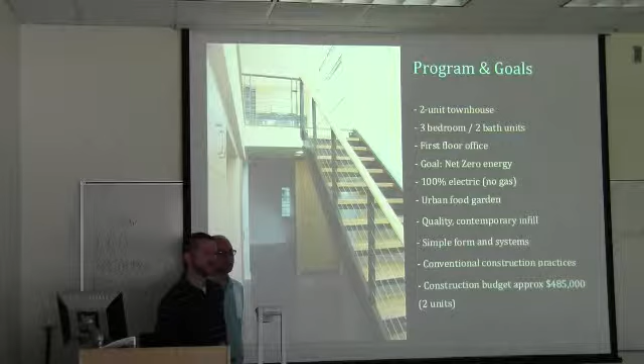All right, now moving on to the Trekhaus. Ella and Randy, who were the clients in this project, just by chance came across the core house and really liked it, and started looking into passive house and realized that was the way they wanted to go. They moved to Portland a couple of years ago and knew they wanted to live in a high efficiency house. Really, their goal was net zero energy. So they did a ton of research seeing what was out there, and they liked the idea of the core house, so they asked if we would be interested in working with them. They found this piece of land over on Southeast Taylor and 43rd that seemed to work well.

So we started designing, and the program they had was that the lot was zoned for 2 units, so to them it made sense to go ahead and build the full 2 units, which gives them kind of a passive income as they get older.

They're looking for a 3-bedroom, 2-bath unit. One of the requirements was that there's an office on the first floor, kind of right near the entry, because Randy is a chiropractor, so he wanted to be able to practice out of his home without having people go all the way through the house.

As I said, their goal is to reach net zero energy use, and that means 100% electric. You can't really offset natural gas use. So we basically decided from the get-go not to have fossil fuels in the house.

A big thing for them was also the garden. They really wanted to have an urban garden that they could grow a lot of their own fruits and vegetables. So that had an impact on the site design.

And then things like quality, contemporary - they kind of like the contemporary look that's in the city. Simple forms and systems, mostly to keep costs at a reasonable level. And then something that's, I'd say, more one of our requirements was conventional construction practices.

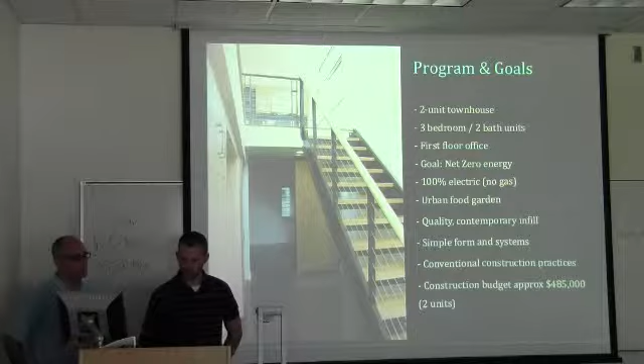And then for construction, they had budgeted about $485,000 for the 2 units.

So just real quick, I don't know how much of this you've seen already, but on the left here we have the first floor. I didn't do a site plan - I have an aerial view coming up - but north is up, so south, and then also the street are down here at the bottom.

On the first floor, so the 2 units, this is 1 unit here, entryway, and because of that office on the first floor, which is right here, we decided to move the living areas up to the second floor. That helped, one, because you get more dramatic spaces with the sloped roof, and you're not confined to, in this case, an 8-foot ceiling, and then also just opening up to the street, but still providing privacy.

But you can see there's a bedroom/office in the front here, another bedroom in the back, and then we have bathroom here, and a laundry. And then they didn't really need a garage, but they did want a place for bikes and for storage and that sort of thing. So we put a kind of garage replacement, or we're calling it the workshop, in the back of the property there.

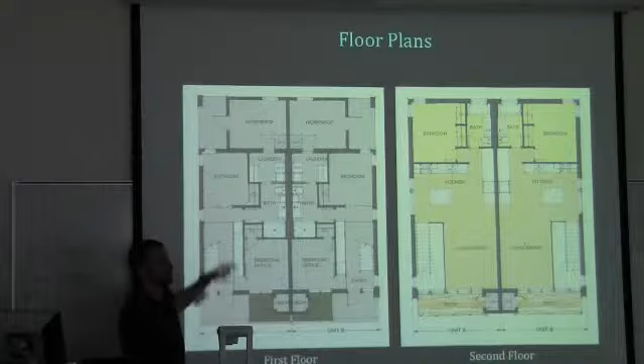These are the stairs going up. So moving up to the second floor, we just have a big kind of loft-like dining, living, kitchen area, and then 1 bedroom and a bathroom.

Okay, so this area that just got hatched is just to really emphasize I was talking about doing simple forms and shapes. And that's really a big deal in a passive house, because one of the big factors in a passive house is your surface area. So if you can minimize that by having an efficient shape, that's to your advantage.

And then also another reason is for the construction details and to eliminate thermal bridging. Intersections are always difficult, so if you can really keep the shape of the building as simple as possible, that helps. So what's hatched here, the hatch is the passive house envelope.

So for example, the workshop isn't conditioned. We have just a little heater in there to make sure it doesn't freeze, but the idea is to keep it essentially at ambient temperature. So this wall here between the two is our fully insulated wall.

And then there's a few things, so that we don't just have a box. We designed on some decorative features on the box that also provide program elements. So, for example, up on the second floor, there's the decks here.

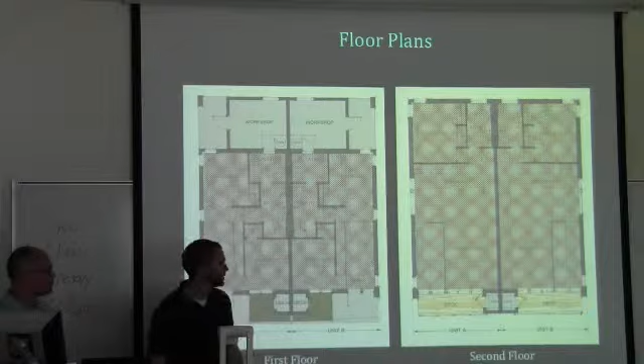One of the things that you might see in another slide is as we're building this, the first thing we do is get to what's called the heated envelope or the airtight envelope. So a lot of the back walls for the shop, since even though they were on the first floor, we didn't build the back walls.

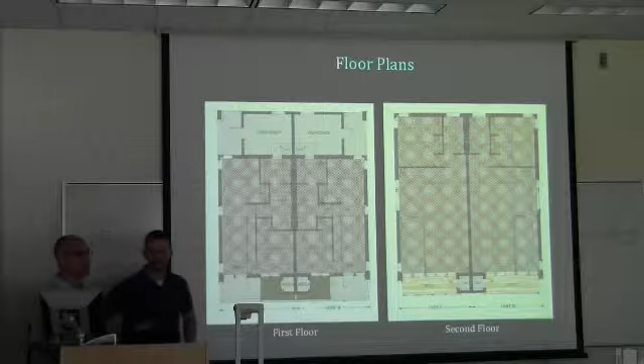We just suspended them up with a couple of posts. This front porch or front mechanical area, that wasn't built until after we got our air seal. So you have to think about the steps a little bit differently when you construct this way. It adds a little cost, but it also allows you to get your air seal easier.

So here's an aerial SketchUp view of the project. Just a couple things to note. You can see this is the street down here. In this case, we pushed the house back almost as far as we could to the north, and the reason for that was for the garden space that they want to have here. They just wanted the southern exposure.

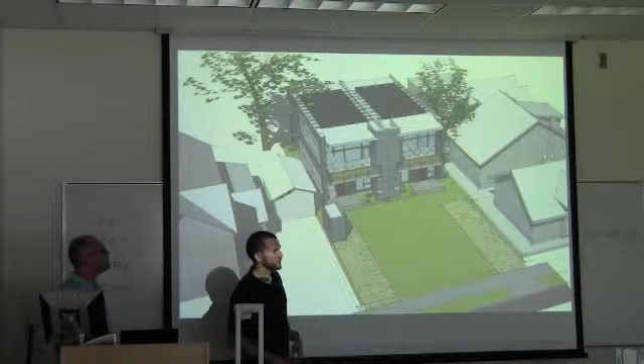Then you can see where this is the living area here up on the second floor, and the deck's kind of overlooking that. Then there's something else. Oh, the roof. That was something we had a lot of discussion about regarding the shape.

And we were limited in the height, to I think 30 feet. So we needed to have enough room for the solar panels, but at the same time we couldn't go so high that we'd be above the zoning requirements. So we ended up doing what's essentially a flat roof. It's a low slope roof, and it actually slopes opposite of what you would ideally want it to - it slopes toward the north. The reason for that was if you're in the living space, that's where we wanted to have the extra height and open up toward the views. So it didn't really make sense to slope down in the direction you want to be opening up to.

And then, when you're doing a flat roof, they actually work really well. They're really good roofs. The main problem is when you have penetrations through those roofs - that's where a lot of times you hear about leaking roofs, and often that's flat ones. But if you can eliminate penetrations and use the right product, you really have one of the best roofs you can do.

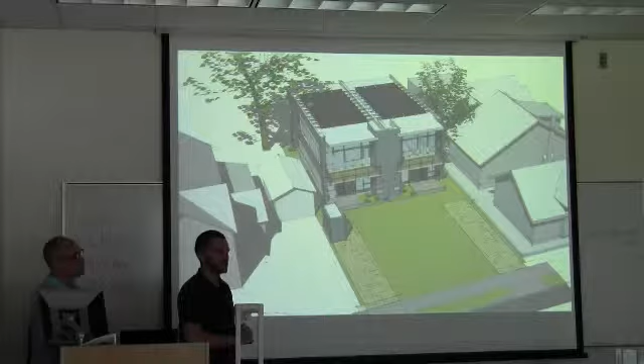So we came up with this plan to eliminate every single penetration that we could. We have one penetration through each roof, but it's actually just through the little bump out, so it's not even part of the conditioned envelope. It's the plumbing - we had to have one plumbing vent go through.

And then the other way we eliminate penetrations is with the PV installation. Usually you put in PVs and you end up with hundreds of penetrations because they all have to be connected to the structural part of your building. But in this case, we told them you can't do that, and the only thing you can do is connect to the parapet on the outside of the building - that's the little wall that sticks up above the roof - and then also in the middle of the building. So we worked with the solar contractor to come up with a system that would span that.

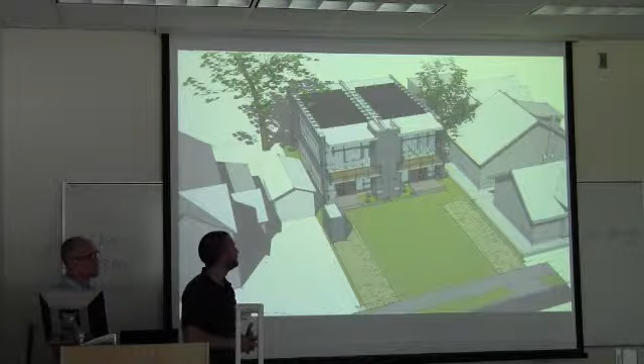It's really something that apparently hasn't really been done before, and most people looked at that and said, no thanks, we're not interested. But actually we just got the system for one of the houses installed yesterday, I guess, right? Yep.

Okay, so this is a screenshot from the Passive House Planning Package. This basically just tells you whether or not you meet the criteria for Passive House. Have you guys seen this before?

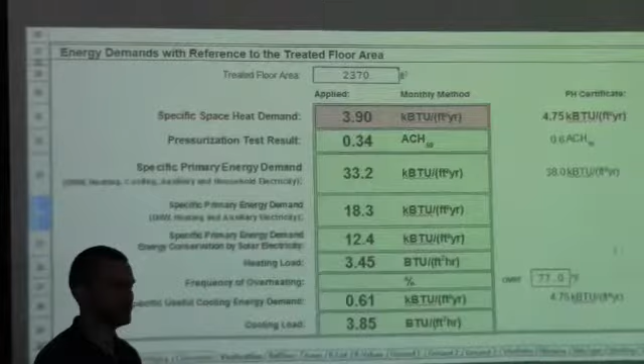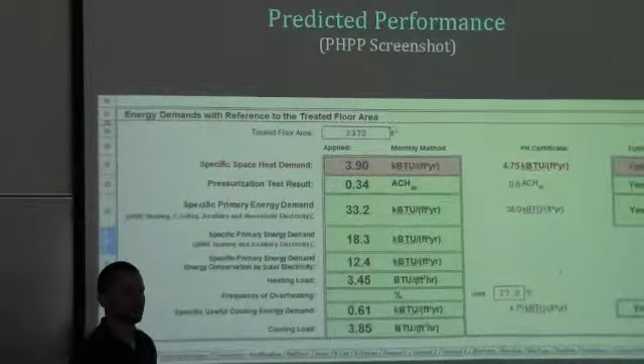No? Okay, so actually you can see part of it here. The PHPP, it's called Passive House Planning Package. It's an Excel file that was developed by the Passive House Institute in Germany. But it's a massive Excel file, and you can see some of the tabs here - there are pages for basically every single detail of the building.

But it all comes down to this page. This is whether or not you meet the performance. When Matt Groves was here, did he talk about what the requirements were for Passive House? You guys remember those?

Good. All right, so real quick, one requirement is the specific space heat demand. That's basically, over the course of a year, how much heat is required per square foot to keep the house at 68 degrees, which is what they set as the comfort level. The limiting factor is 4.75 kBTU per square foot per year. So you can see with the design, we ended up at about 3.9. We just wanted a little bit of buffer in there in case something during construction came up where we ended up with a thermal bridge or something - it just gave us a safety factor there.

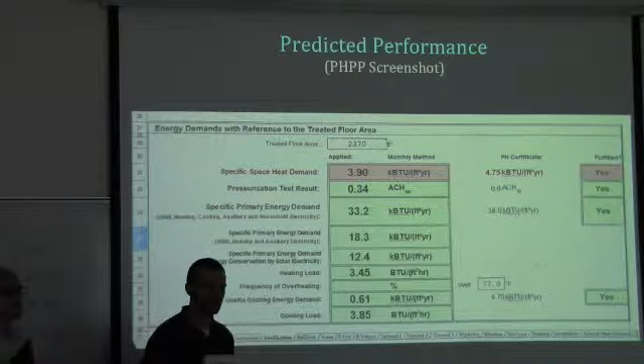Then there's the pressurization test. Did Matt talk about blower doors? Does that kind of make sense what that means? Okay, so the blower door test has to result in 0.6 air changes per hour.

And we tested at, I think that's right, 0.34. It was right around there. So again, it's kind of giving us a safety factor. The hope is that over time, if something loosens up or the building shifts a little bit, that we're still within the requirement for passive house. So that's something we'll want to do, maybe in a year or two, is come back and see what the tightness of the house still is.

And then the third requirement is the specific primary energy demand. Did Matt explain that?

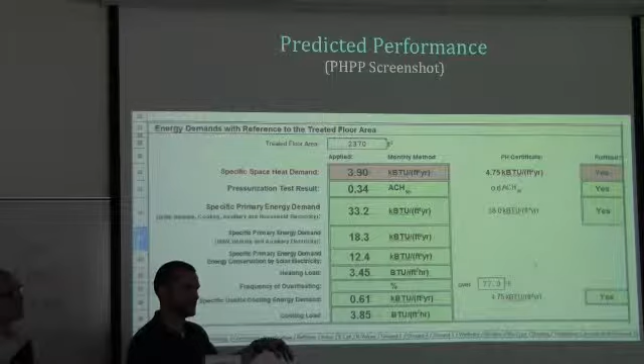Maybe? Okay, real quick, I won't go into too much, but basically what Passive House is interested in, and this is really unique just to Passive House as far as I know, no other green building standard does this, is the total energy use of the house per square foot. But they don't measure that at your meter. The idea is that you measure that energy use at the point of energy production. So they estimate that to get power from the power plant to your house in Portland, using just kind of an average for the country, you lose something like 60% of your energy just through transmission. So there's a multiplication factor. It's basically what the house is expected to use times, I think it's 2.7. I have to look to see exactly. But that's the number they're looking for.

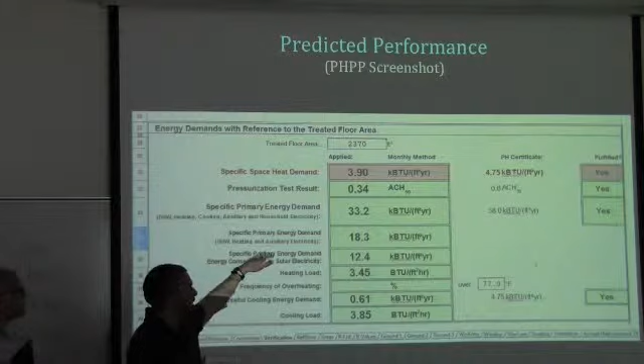And the idea for that is, if your true goal is to go to net or carbon net zero, not just energy net zero, you really have to offset your total use at the source. Because if your power plant, here fortunately we have hydropower so it's less of an issue, but most of the country is really coal, the idea is that you have to offset what is being produced at the power plant, not what is going through your meter. So the idea of Passive House is that you get your actual usage as absolutely low as possible before you start introducing things like PVs and renewables. Anyway, it's an interesting topic.

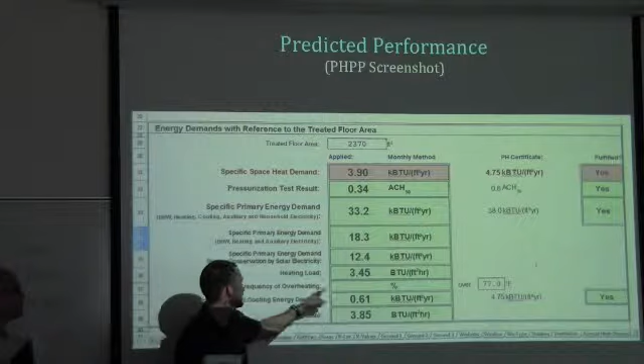But then there's a few other things here that we won't really talk about, but there's a little bit on, let's see, that's the heating load. There's the cooling load, and then there's a frequency of overheating. The reason you don't see a percentage here is that this project has mini-split heat pumps that provide cooling. So if those are used, there's not going to be any overheating. But if you actually model it without those heat pumps, we predict something like just under 2% overheating, which means over 77 degrees, that's how they calculate that.

Moving on, looking at what was predicted. Ella and Randy moved into their unit just before Christmas, right? Yeah, just before Christmas. So they have 3 months of energy bills, and we're interested to see how that went.

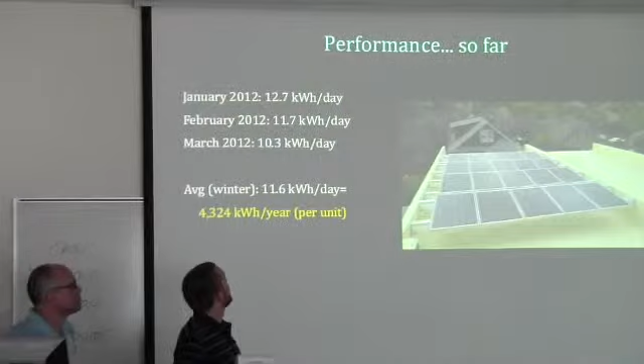What they saw is that in January, they ended up using about 12.7 kilowatt hours per day. Then February went down to 11.7, and their most recent one was 10.3. Those numbers obviously make sense as we get into warmer weather and they're using their heating system less, and their water heater, which is a heat pump water heater, is getting more efficient. So we're seeing that drop.

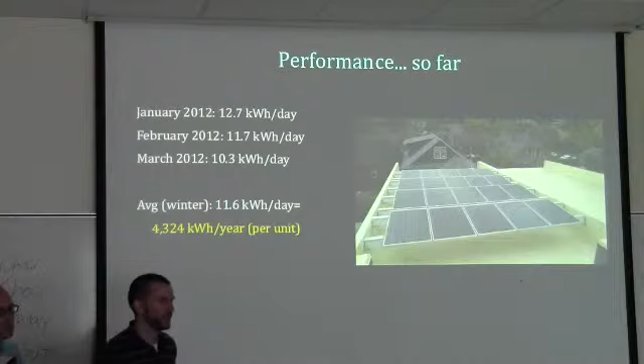But just because we want to jump ahead and see where things are going, if you look at their average for those 3 months, they're using 11.6 kilowatt hours a day. Hopefully that goes down over the year, but if you multiply that times 365, you end up using 4,324 kilowatt hours per year per unit. If you go back to the Passive House model, it showed 4,385. So hopefully their numbers go down, but we're looking pretty good so far.

And then the PV system that they just put on, you can see the photo from yesterday, has a predicted output of 4,581 kilowatt hours per year. So it looks like, at least so far, we're doing pretty good for reaching their goal of site net zero energy.

Okay, moving into some of the assembly details. I'll do this and then we can go to the next one. I don't know how many people are going to fall asleep here, but...

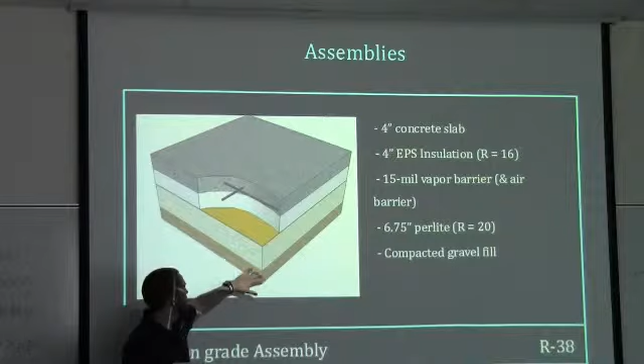Anyway, this is a little diagram of the typical floor assembly for the first floor. If you start down at the bottom, we have our compacted gravel. And this here is supposed to represent our perlite.

Do you want to explain the perlite? Sure, we can pass this around. Do you guys know much about or heard about perlite?

Perlite is baked obsidian. First they crush the obsidian to about this size, then they send it through 1400 degrees. Every molecule of obsidian has water surrounding it, so when it gets heated, it liquefies, and just like popcorn, the steam blows it up. So they end up with two products.

One is the structural type, but this smaller porous stuff is the agricultural version - we don't really use this because it crushes easily. This other stuff they use in all sorts of construction, they pour it in. This is what they fill your CMU buildings with for insulation, so that goes in as part of the construction.

We used it, it comes in... did we show bags of it yet? Not yet, we'll get there. Okay, so that's what the perlite is created with.

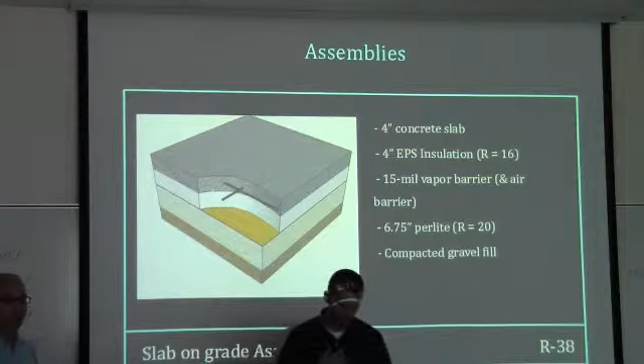The next layer is our EPS, 4 inches of EPS. In between those two layers, the yellow layer is a vapor barrier - we use a 15 mil vapor barrier. I'll turn this around, this is the vapor barrier. It comes in sheets, and we'll have some photos of all this so it'll make sense.

So just real quick, the reason for the perlite is, one, we like that it's mined in Eastern Oregon and produced in North Portland, so it's kind of a local product, which is cool. It's also a non-petroleum based product, which we like. It was kind of an experiment - not many people have used perlite in this application, but I figured we'd give it a shot. It was a little cheaper, so it was an interesting process.

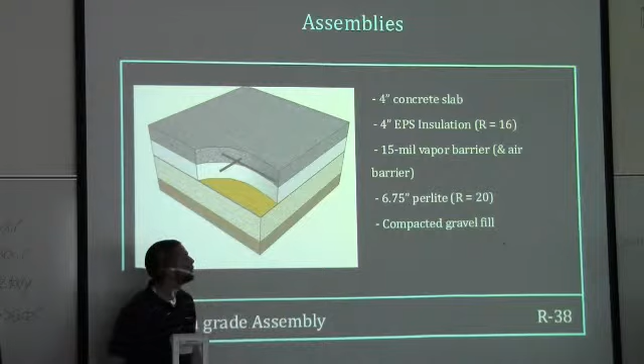So that's to the vapor barrier. Then we have another 4 inches of insulation directly below a 4-inch slab, and we actually use the slab as a finished product on the first floor.

Okay, typical wall assembly - kind of going back to trying to use our standard construction. Basically it's a standard stud wall. To get some extra insulation, we upsize the framing members from 2x6, which is pretty typical, to 2x8.

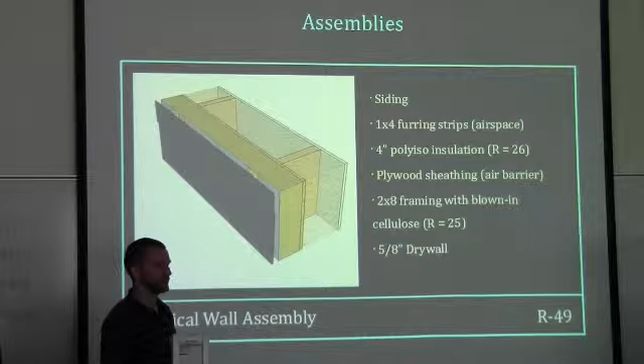But then we did advanced framing, which essentially means you eliminate any piece of wood in there that doesn't have a purpose - which, percentage-wise on a typical project, is a substantial amount of wood that really doesn't have to be there if you look at what it's doing. I think we have some photos of that.

The cavity here we used blown-in cellulose insulation, which is recycled newspaper. Then there's the sheathing, this plywood, and that's our air barrier. As we go look at photos, you'll see that's essentially where we're trying to keep the air - that's the barrier to keep the building airtight.

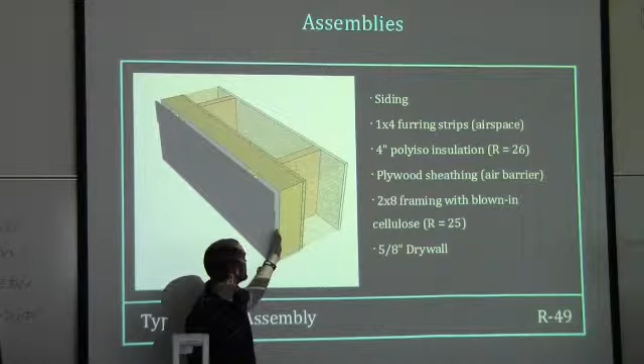Outside of that we have 4 inches of polyisocyanurate insulation, which has a foil face. Then we use 1x4s to create an airspace behind the siding, which basically gives somewhere for any water that does get past the siding - it gets into that airspace and drains behind there. Then there's the siding, and we use mostly fiber cement, but we have a few places with wood and some other materials.

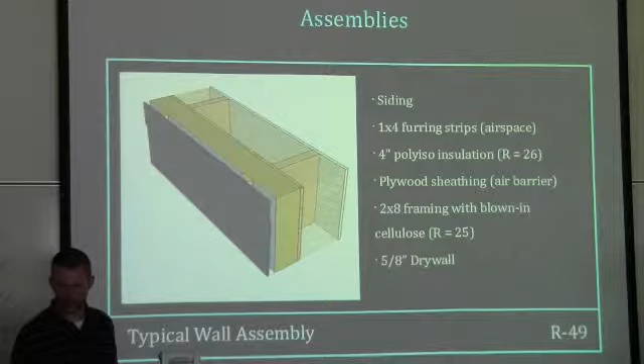Sorry, let me back up - I didn't mention slab on grade. We have an R value of R38. Walls are R49. And then the roof, which ends up with R77.

Basically, again, pretty typical assembly up to here, which is our sheetrock. We had 11 and 7/8 inch TJIs, which are basically manufactured trusses, like I-beams. And then we have our roof sheathing, plywood - again that's where our air barrier was. And then 7 inches of polyiso on top of that.

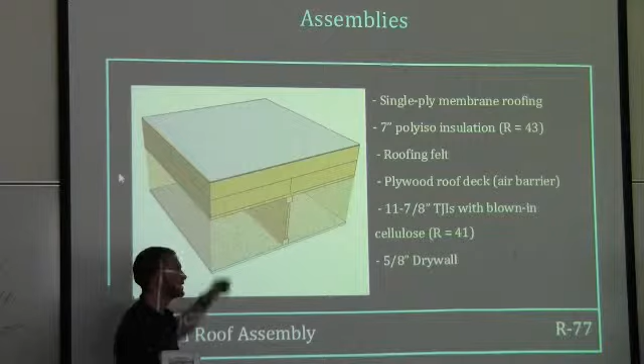And then the single ply roofing, which we don't have here, but it's basically a really thick piece of 60 mil rubber type material. Do you want to talk about these?

So the first thing we found on the last job was that we had a real problem with a thermal bridge at the concrete, where our two concretes met.

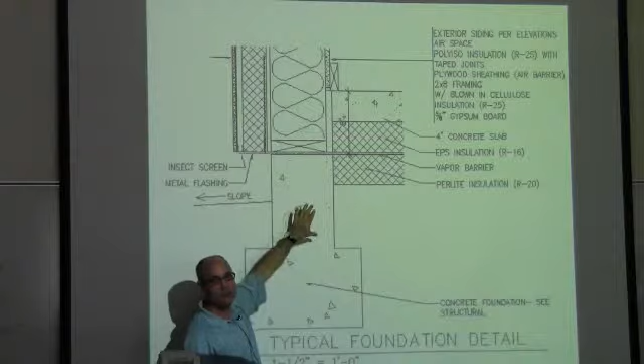So the first job we did, do you guys know, how many of you have seen the details on construction and stuff like this? Somewhat familiar. Most construction, you would put your slab down inside the concrete. That's standard operation. But the problem is, by putting your slab down by your concrete, you have a thermal bridge right here at the heel of all of your walls.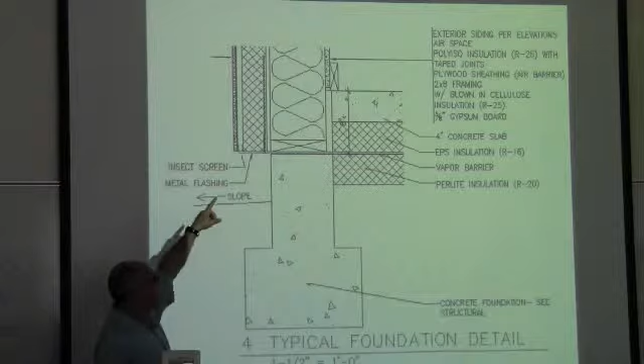So what we did was we actually built the exterior walls, put a piece of plywood in here, an 8-inch piece of plywood, and then poured our slab inside the walls. It's more of a commercial operation. It causes some problems with my concrete guy, he really didn't like me for that, but it gave us the ability to get our insulation down to where it's closer to the insulated barrier below.

Also, you can see the insulation outside and inside, and then the sheet and then concrete.

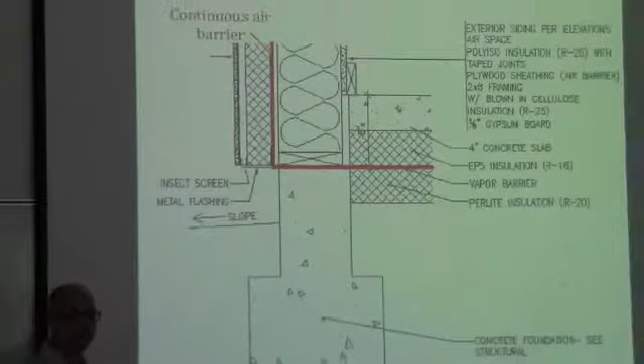One of the things you have to really pay attention to, in everything you do in Passive House, and what everybody should be doing in construction, is paying attention to where the air barrier is. Most of your heat in conventional building just goes out through infiltration, through air. So what we do is pay real attention before we even start to where we're going to put all this.

This is our vapor barrier, the vapor barrier is 15 mil plastic that goes underneath, and then we glue it up the side of the wall. So it's a way of creating a continuous barrier from underneath and up.

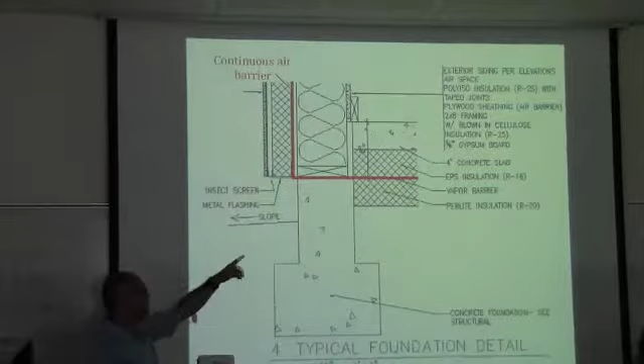And the plywood there continues the air barrier. We glue it to the plywood and tape the top and go on up. We also did this, I'll pass this around, this is a gasket that we got out somewhere in Massachusetts.

This went right under here, under the sill plate, just to create another kind of safety barrier for air. So we use these in a number of places.

A couple of things that we don't do - a lot of people use what they call sill seal, a piece of foam about 1/8-inch that goes on top of all the concrete, and you set your walls on top. It's a barrier for bugs, and also a barrier for moisture transmission from the concrete to the wood. We don't need that because we have a continuous vapor barrier going all the way out, so it's a replacement, and then we put the gasket on.

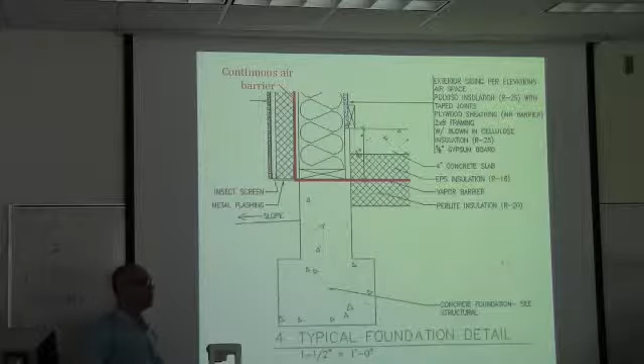So there's a few things that are standard in operation and standard in construction details that we don't end up having to do because of this.

These are the bags of perlite, and they came basically in a 2 or 4 square, I think 4 square per bag, and we just left them in the bags because one of the things we found out real quick is that if you open them up, this stuff just flows everywhere, and it's also a water attractant, so it will suck up water like you cannot believe.

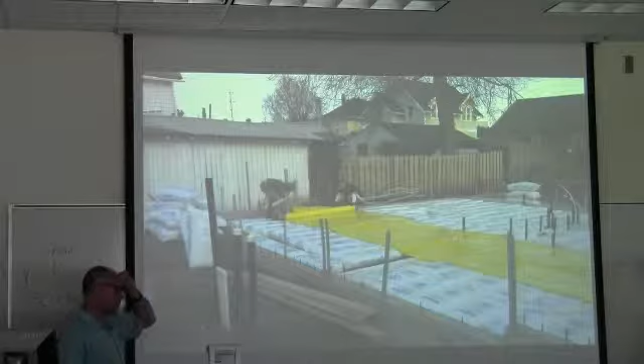And we did this in the middle of March, and it was just pouring. So we just laid them in and packed them in very tightly, and then we started rolling out our vapor barrier. The vapor barrier is, I think, 20 feet wide - it rolls out wide.

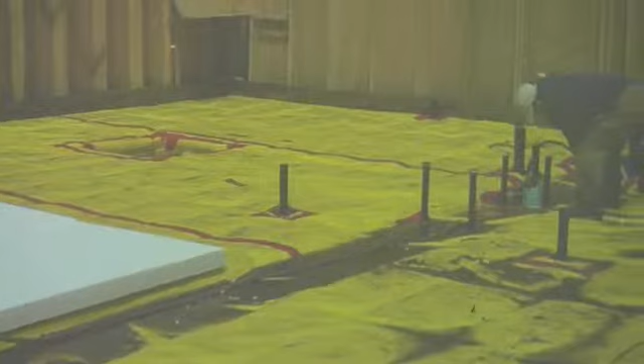Wherever the vapor barrier connects, we tape it together, and then we create a boot around each of the penetrations for the plumbing. When you lay this out you can't really get it perfect, so you lay it out as best you can, then you boot around all those, getting very tight to the pipes, because we don't want any vapors coming from the gravel up into the building, and we want to keep all the air from going out of the building.

You can also see that at this point we had already framed the first 4 walls. This is marine plywood that we put all the way around, 8 inches tall. The slab is going to go to the top of that marine plywood.

You can see certain things - there's a single top plate, usually there's 2 pieces of top plate, so we eliminated one that really isn't necessary. The spacing of the studs is 24-inch on center instead of 16, which is pretty common. The other thing you'll notice is if you look above all the windows, there's no headers. So we eliminate all headers, we eliminate anything that we can move into.

When you're building a second floor, or anything really, you've got rim joists all the way around the building, which is a structural member. I still haven't gotten most of my engineers to explain to me why you have to have a massive piece of lumber over your header if you've got one above that. Our engineer just puts them wherever he wants, so if there's an opening larger than about 5 feet, you have to go with a double rim.

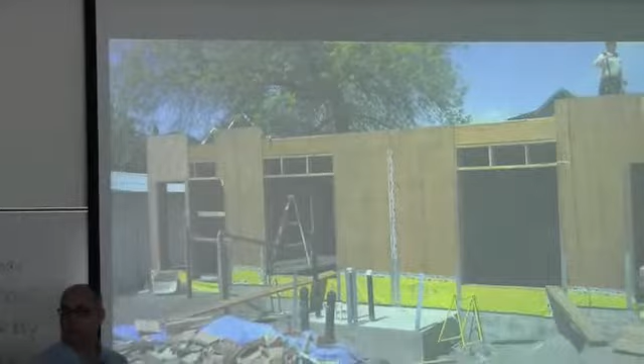So this is the beginning. Now we've framed the front wall that we had left off, and you can see where we've taped up. We glued up and taped on the vapor barrier underneath, and this is all of our taping coming up over the top. One of the tapes we used going around the building was a 3M single-piece tape. If you're gutsy, you can peel a little bit back and see how really sticky that stuff is. It's got a very good stretch.

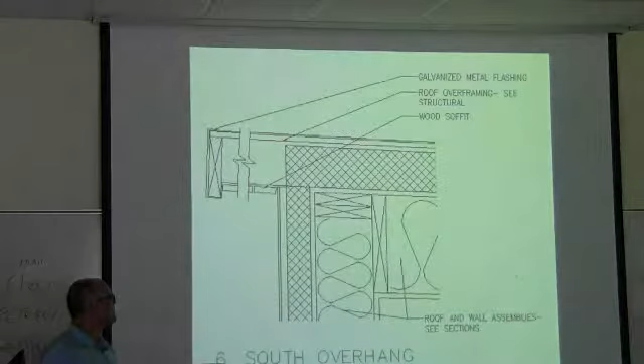One of the problems with this kind of construction is you want to make sure you've got a lot of room to stretch, because that material is your air barrier, and it's got to survive a lot of dumb construction. So this is our barrier at the... okay, this is a wall section, isn't it? Is this the wall? Oh, this is the roof. Wall to roof.

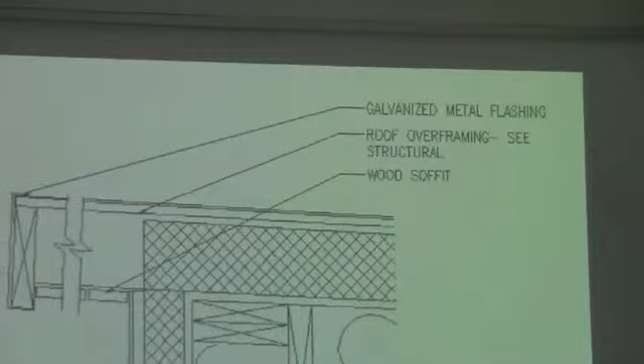Pretty much the way we did it is we tried to build straight up to the top of the wall. A lot of times what you do instead is build your wall to the roof line and then put your joists out here, which causes problems with thermal bridging and also makes corners harder to get right. So we build our walls straight up to the tall point of the roof, and then we plywood all the way around, which allows us to keep our...

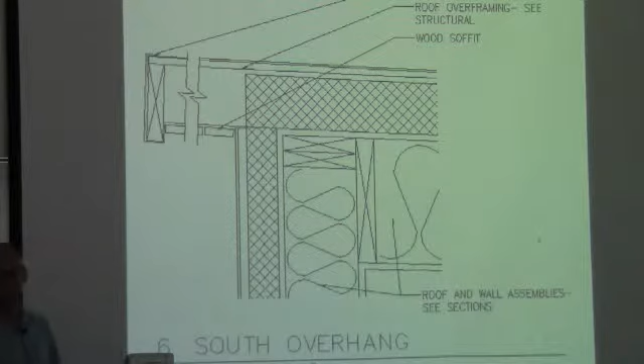Did you do yours? Yeah. So that keeps our air barrier consistent. Again, we've traced our line around, so it's on the outside of the plywood, underneath the final insulation barrier.

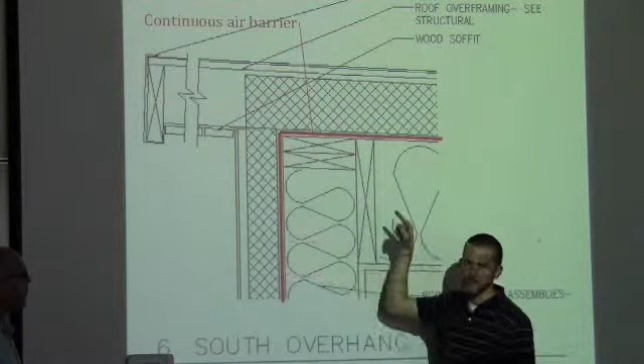Just to contrast that with typical construction, we had like a 5-foot overhang on the front, I think it was. Normally what people would do is take the roof structure and just cantilever it out if they wanted a big overhang. But that intersection is basically impossible to air seal and impossible to get a continuous layer of insulation around.

So the idea with what we did, and you'll see this in some more photos, is that we were building a box. You can see here, this is our box. Then we take this box and get it completely air sealed, and make sure we can essentially continuously insulate it as well. Then we move on and add all the decoration to it.

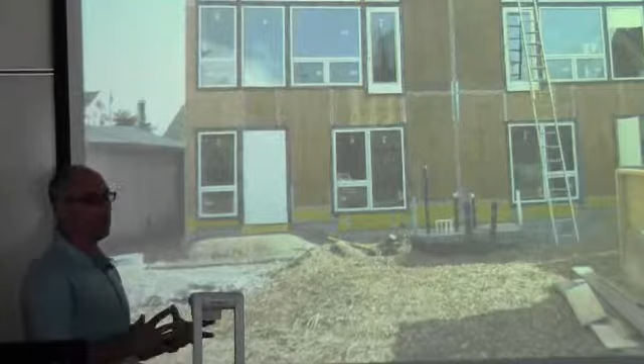So now you can see all the white tape is the 3M, and then we learned on the last job, and we finally decided we weren't going to do this again on the next job. We used a Vycor tape, and Vycor tape is really good on plastic-to-plastic, or areas that are not wood. But if you want to stick it to wood, it takes a primer, so you've got to prime the wood and then put it on. So it's a two-part product, much more labor intensive. It's half the price of the other stuff, but...

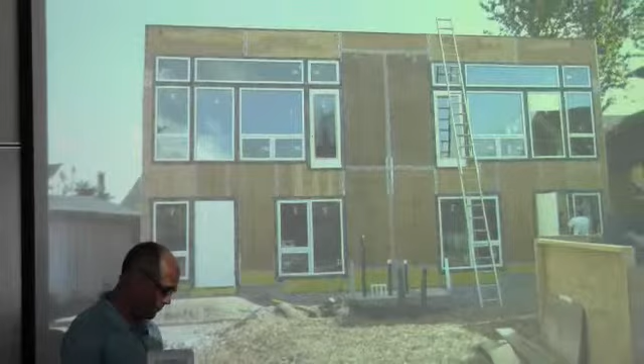It also has a petroleum product in it. So on this project, around these windows, where we had to come up around the edge of the window, if it's exposed far enough, we're finding it's bleeding into the paint, making our nice white paint turn black. Not fun. So we're going to move to all the 3M type tapes. Learning process.

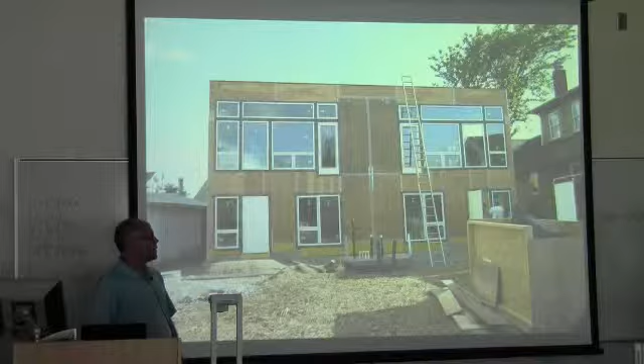This is our sucker door, an invention we created just so we could find the holes. I think Matt talked a little bit about the blower door, which is essentially where you put a fan on the building that measures the amount of air going through, so you can see how much leakage is in the building. This takes that to about 500% above that.

So these are two 3,000 CFM fans pointed outward, creating negative pressure in the building. What we found was, one, I just wanted to do it really bad, sounded like fun. But what it told us is that instead of doing smoke pencils, which is really hard to find all the holes with, we could walk around. Once we put the pressure on the building, you can walk around the outside and every hole is screaming, whistling at you. So you just walk around, listen for them, and plug them, and pretty soon the exterior of the building becomes quiet. So it was just fun in the first place, but now it actually has a purpose.

So we time this to do it after we've made our box, but before any subs come in. It's the best opportunity to check if there are problems with our airtight layer.

Actually we don't have it from this project, but do they have speakers here? We'll find out. Just to give you an idea, this is from the core house. Let's see what happened here, how much pressure we're talking about. I don't know, do we know if there's speakers? Oh, it doesn't matter, you don't need speakers for this one. You can just get an idea from this video.

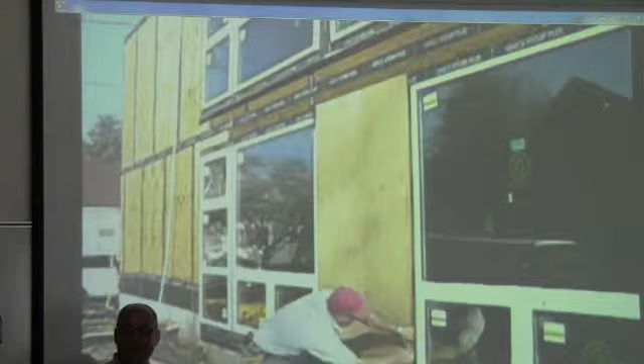So the door didn't exist. It doesn't seem like much now, but Rob decided to pull the thing off. The fans are running out, and you can see it stuck to the building. There's nothing else holding this but air, so it's a lot of pressure. You can't open the doors when the fans are running, or crank the windows open, but it works really well.

So with that, we were able to go around and hunt down all of the holes in the walls and stuff, and it was pretty effective. You can see our tools here - we use tape.

If it's plywood in general, it's pretty good as an air barrier, but every once in a while there might be knots in the different layers of wood that line up and allow some air to come through. When you walk by, you can hear it whistling, so you can find where that knot is and just put some tape over it.

We use tape, caulking, and my favorite - this is my favorite tool.

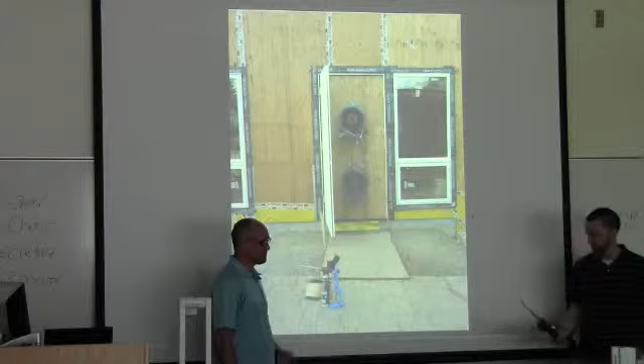The foam gun. So we used anything we could to plug the holes. We found the foam gun and tape work the best, but there are little holes where even the tape doesn't work, so you actually have to caulk those up.

A lot of times, if you have a long break in the CDX plywood - we use CDX, not CCX, we could get away with CCX but it's twice the cost - the caulking, sometimes you just have to caulk up the whole seam. This one wasn't too bad. The last job had a lot more transfer through the plywood. It was surprising, the difference between different factories of wood.

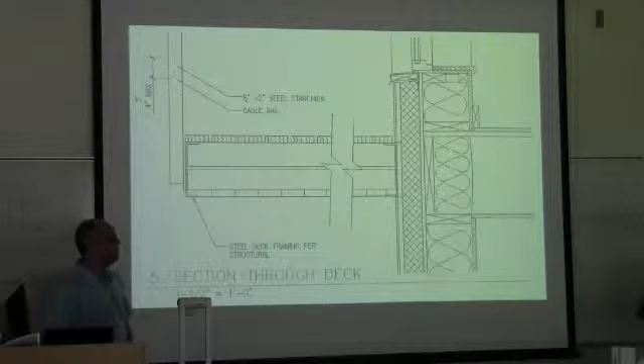So this is one of the details we worked really hard on, trying to figure out how to build a deck. One of the things is the deck is pretty much cantilevered out on one corner, so it's just hanging out there. This is all a steel deck, but the steel is sitting here.

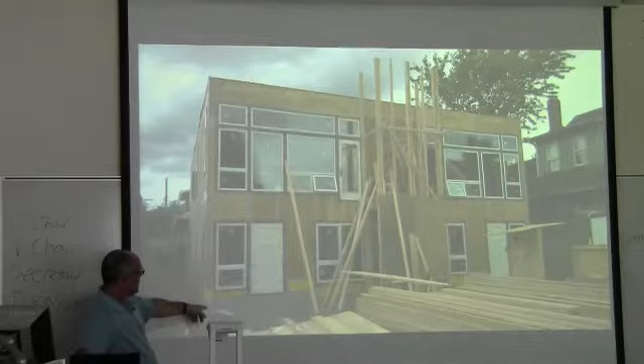It's outside, completely outside of all of our roof membranes. So we hung it - we put a beam in. We built this out here separate from the building, on the outside of our envelope. Over here there's a post, a post base, and we took a glulam and stood it on end outside of the insulation.

Here's the insulation - this is the glulam sitting out on the outside. It goes all the way down to the foundation and is tied into the top parapet wall, and that's the post there. So that whole far end of this steel structure cantilevers out from that post.

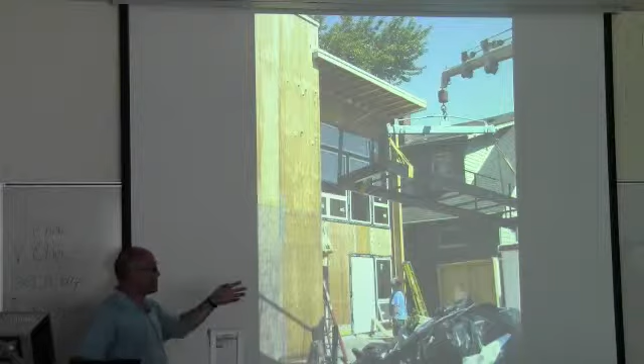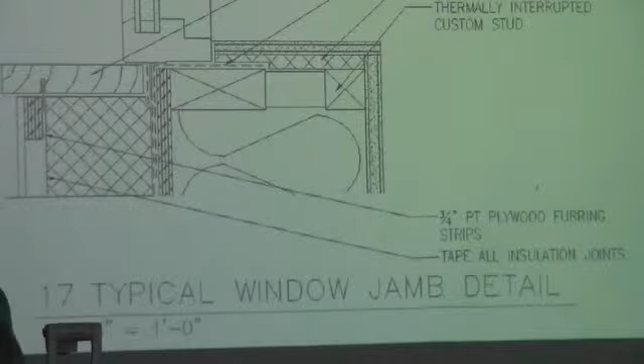The hard part is when you take anything of that size of metal, it's going to create a huge thermal bridge. So we went through a lot of gyrations with our engineer to figure out how to solve the problem with thermal bridging. At our windows, we used thick frames, which is another thing we're trying to figure out whether it's actually worth doing, because our thoughts were around the windows where we have most of our thermal bridge.

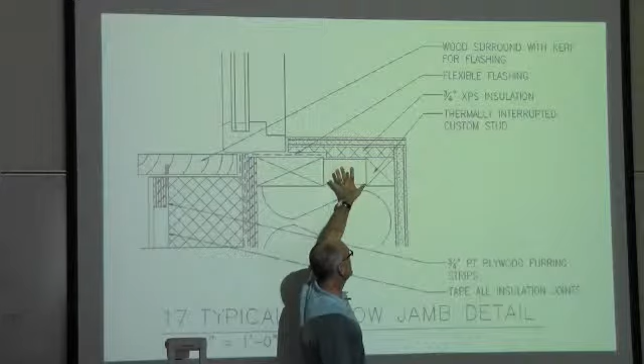We have a piece of wood here to create our stop around the window on the outside, so we put a frame around the outside window, and then you've got your framing member on the inside—a straight through piece of wood all the way through the building to the outside. So we put the ticks in, which gives us a thermal bridge or thermal break, and this is a piece of XPS, 3/4 inch insulation around the window under our sheetrock. Then we use gaskets and foam around the window, and tape on the inside and outside of the window—so there's a layer of tape here and a layer on the inside.

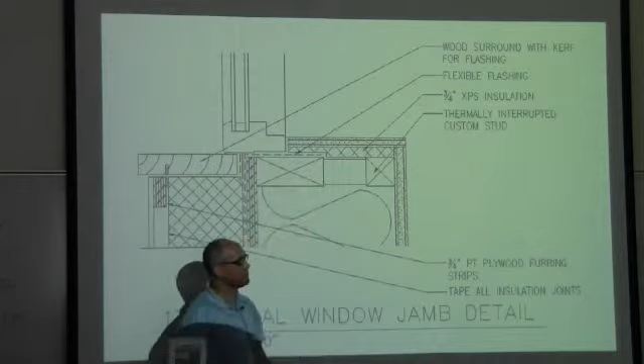So this is on the ground. This is the framing of one of the ticks, the way we frame a window—here's our layout of studs. You can see this is a 4-foot opening, and you're framing basically 2 foot on center with a stud in between to support the center of the plywood. Standard framing is 16 inch on center, so you have more wood in the wall. We've eliminated about 20 to 30% of the wood just by going to 24 inch on centers.

Typically, framing around a window would have 2 sticks of wood coming up, a big piece of wood on top, then you'd put the window sill, and a couple of studs underneath that. What we did was just put a header from one layout stud to another layout stud to bridge that, and then built our window in between. So we took out about 6 or 7 pieces of wood around a typical window just by changing the framing, and putting ticks in eliminates even more wood.

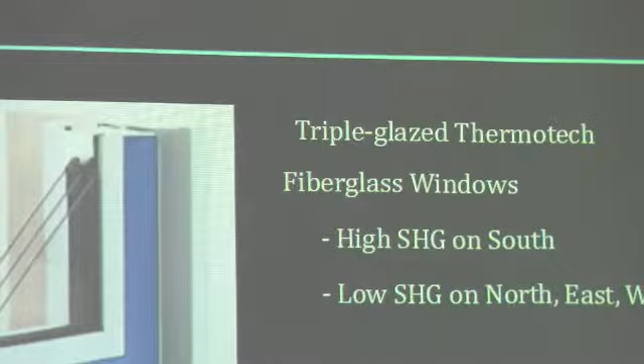This is our—this isn't the same window, but it's kind of the same, isn't it? About the same, basically the same window. These are fiberglass windows. The next project we're using, what is that—unplasticized PVC, no idea. Do you want to talk about the windows?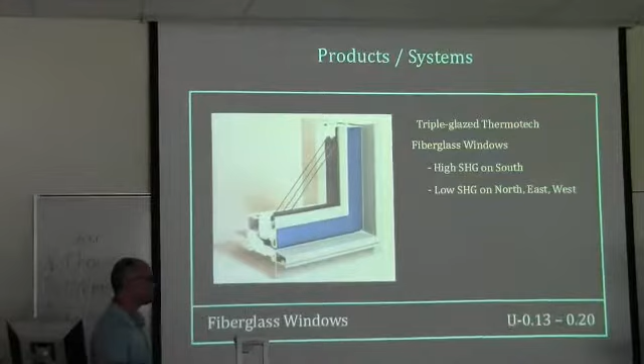We looked at different glass types depending on the orientation. On the south, you can control the sun pretty well because of overhangs and the angle you get. East and west is much more difficult because it doesn't matter what time of year, the sun gets down lower—you guys have looked at passive solar, that idea. So on the east, west, and north, it made the most sense to have super insulating windows that don't necessarily let in much heat. But on the south side, you want good insulation while also taking advantage of the sun that's down lower in winter and higher in summer. So we selected glass that was different depending on which facade it was.

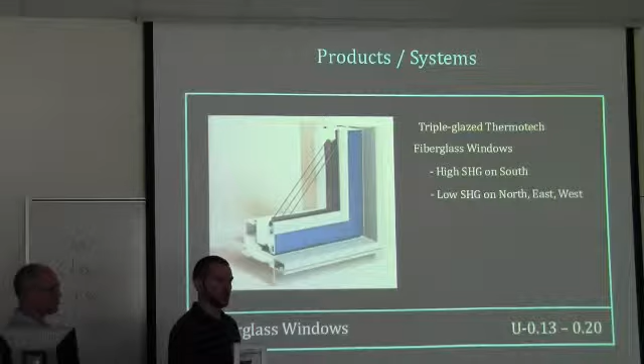Energy Star just moved to requiring a 0.3 U value—the lower the number, the more insulating. But the windows we used are as low as 0.13, so they're nearly 3 times as efficient as the Energy Star house would have. I think that's about it for the windows.

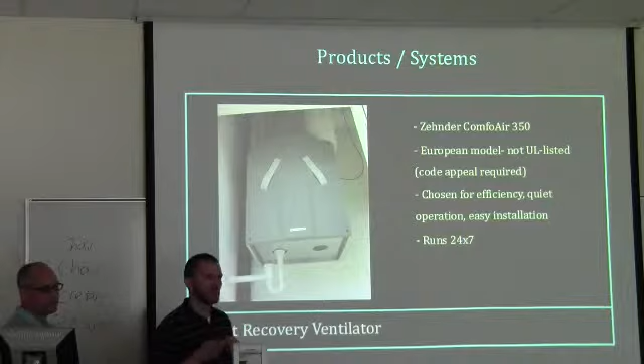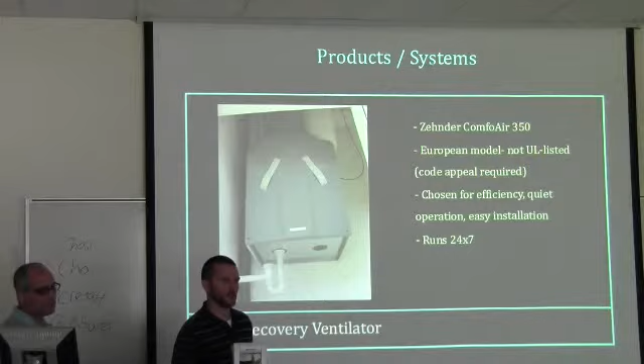Okay, so Matt Groves, who's here, he works for the company that manufactured the heat recovery ventilator. Does the idea of an HRV make sense? Most people haven't really heard of it, so good. The product we use is the Zehnder. There's essentially two HRVs in the US market that work well enough—about 30 out there that are worthless, in my opinion. But there's basically two that have been used on passive houses, and we really like the Zehnder system. One, it's super quiet—when it's running, you essentially don't hear it. The other thing we liked is that it's a complete system, coming with all the ducting, diffusers, and grills for the whole system. And the ducts are pretty cool, Bart will pass that around.

It's a flexible duct, but it's double layered, so it's flexible but still smooth on the inside. So it's not going to accumulate a lot of the dirt that a typical flex duct would. And it's also 3 inches, so it fits in a standard 2x4 stud.

We had never done this before the core house, but we put the whole system in. Took a day or so for the whole unit. So that was pretty cool.

The really cool thing is the way they have their connectors - they're just basically an O-ring. So you slide them into an O-ring, and you have a single clip. So the whole system just snaps together, and it's airtight. It's pretty cool, like playing with Legos.

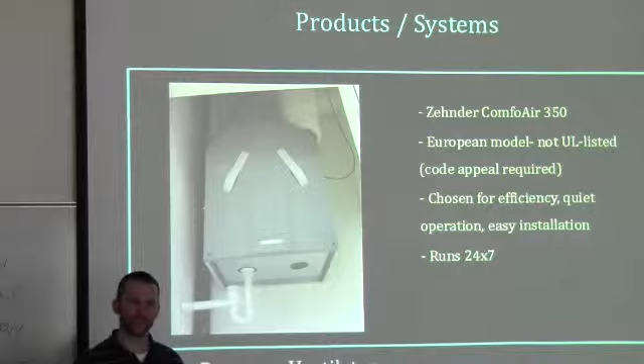The only downside is the product isn't UL listed. So to use it, you have to go through an appeal, but that hasn't been a problem for us so far. So you can see here, this is the unit itself, which in our case was in that little bump out on the south of the building.

Then we bring in 6-inch ducts that come to - it's a little hard to see here, but you can make out there's this metal box here, and then the 6-inch duct coming from the HRV plugs into those. One here and then one here. But then from there, these are what they call the manifold that breaks it down into the 6 ducts.

We have all that go home run from here to each room that has a duct. So it's pretty cool. The whole thing snaps together, and you don't have to worry about taping or sizing or anything that you have to do with metal ducts.

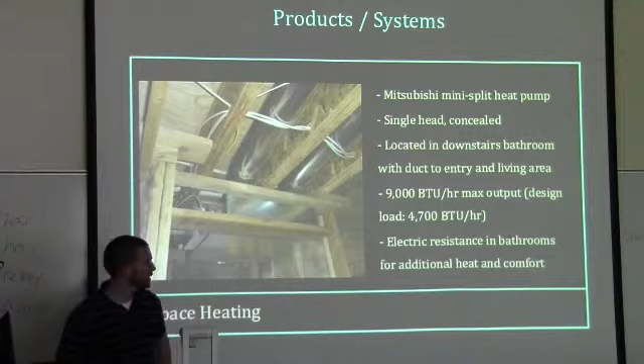So this is a photo here of the space heater that we selected. The first project we did, the core house, we went with essentially a hairdryer for the house. I don't have a photo of it, but in the duct for the HRV, we bought an inline duct heater, which is a 1,000-watt electric element that's controlled by the controls for the HRV. That just turns on if extra heat is needed.

Great thing about it is it's super cheap. It's $350, so that's your heating system. Downside is it's electric resistance, so the efficiency is essentially 1-to-1.

A passive house uses very little heat, so the idea is that it doesn't really matter that much if your heat source isn't super efficient. But since the goal here was to go to net zero, we decided that if we could make this heating system more efficient, that meant fewer solar panels. So we decided to go with a mini split heat pump.

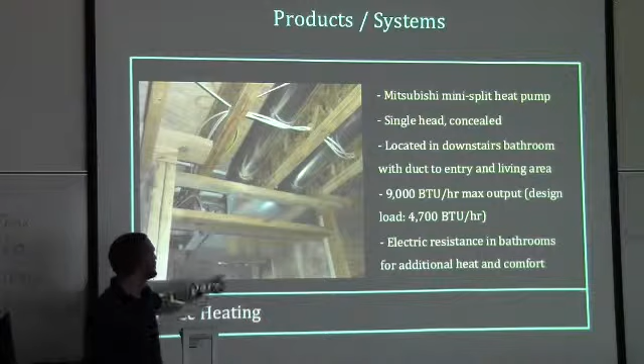Most common for those is you have the unit that sits on the wall, but we decided that wasn't really the look we were going for, so we chose a concealed version, which has short ducts that basically duct it out of the wall. So all you see is a couple diffusers.

It's the absolute smallest heat pump that's available that we could find. It's rated at 9,000 BTUs, whereas the heat load for the house is something like 4,700 BTUs per hour. So it's still way bigger than what we needed, but it seems to be working pretty well.

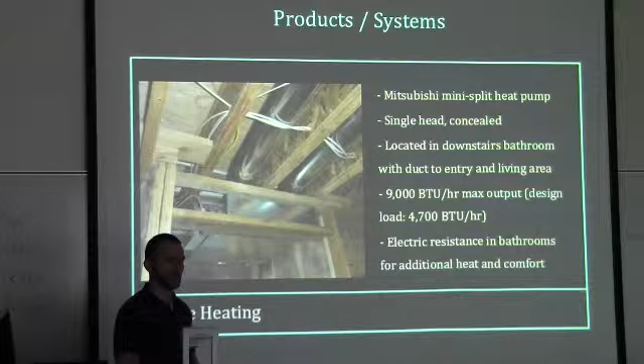And then we put a couple electric resistance wall heaters in the bathrooms. One, just for backup if there's an issue with the heat pump, or two, if you just want a little extra heat in the bathrooms. But it seems like so far they're not really using those very much.

Then there's the water heating, and that's always a big question, how you're going to heat your water. We definitely spent a lot of time looking at solar hot water. There's a lot of questions about whether it really makes sense in this climate when you look at the cost. It can certainly be argued either way, but we also knew we're going to need pretty much the whole roof area for PV, plus the extra weight of the system that would be required for solar. We decided to go with a heat pump water heater.

Which is pretty new to the market here. But the byproduct of that is it cools the air. So we decided to put that outside of the thermal envelope. It's located in the workshop in the back of the house.

So definitely that's one of the things that you guys are doing monitoring of, and it'll be real interesting to see how that performs over the course of a year.

One of the potential synergies is in that workshop. That's also where the inverter for the PV system is installed, and the byproduct of that is heat. But it prefers to be cooler. So this is helping keep those cool, and the inverters are providing heat for the heat pump water heater. So hopefully there's a little bit of synergy going on there.

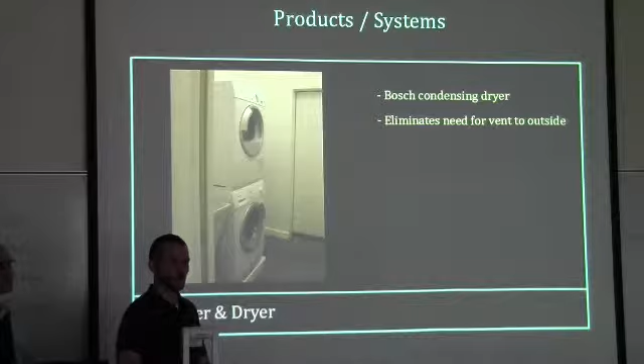But then you also end up with a big duct penetration through your wall that's there whether or not your dryer's running. In a passive house, the rest of the building is so tight that if you have a typical dryer blowing air outside, that makeup air can't come from anywhere because you don't have that much leakage in the house. So you'd actually have to open a window to run a dryer, which you obviously don't always want to do.

So what we've done is installed a condensing dryer, which basically heats up the air within the dryer so that water evaporates, then runs it across a cool surface where it condenses, and the water in the dryer goes down the drain. The models out now, this is a Bosch from Germany. They're good, but they're slow. A cycle takes an hour and a half to two hours.

So the alternative is that you put a typical dryer maybe in your garage or something. What's the size of the heater within it? That's a good question, I don't know, I haven't looked into that. We just go off of their rated energy consumption.

Do they cost more? Yeah, they do. Each, I think they're about $1,000. So they're quite a bit more. But they are German engineering, kind of the Mercedes of small washing machines or dryers.

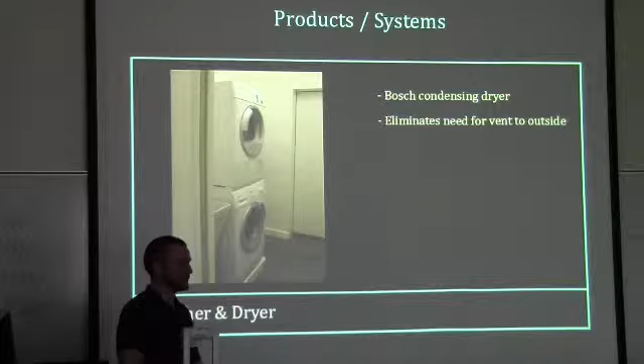The ultimate washing machine. The interesting thing is they're all programmable. At the courthouse, the owner there has decided she needs the most heat in the morning when she wakes up, so she has it set to run then. She puts her clothes in and has it turn on in the morning, and that provides enough heat to warm the house a degree or two to comfort level. That's exactly what the PHPP is modeling—it takes all those internal loads and figures that as long as you can capture them, they'll contribute to your heat demand.

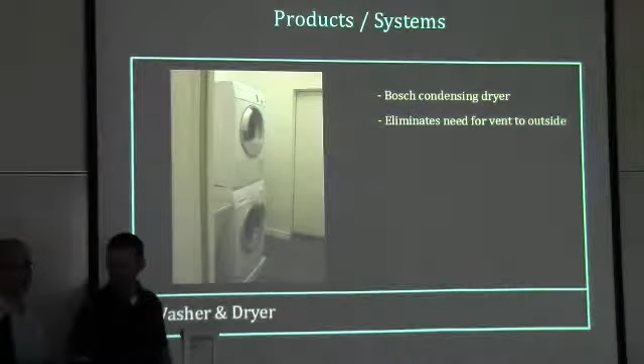Were you able to cantilever that outside corner? The question was whether we could cantilever the deck, since we had the beam on one corner, without using a post. Yes, we were able to—we did a moment connection back at that beam. The steel comes out from the beam, and welded to the back of the steel at that post is a channel running up and down, which gave us the moment we needed.

Any other questions? In the back - you're using a heat pump water heater, right? Are those pretty common, and are you using refrigerant? So the question was about the heat pump water heater, if they're common, and if they use a refrigerant.